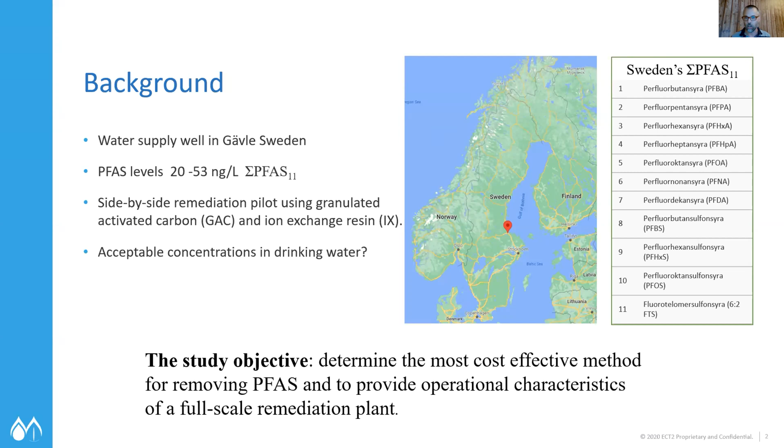So here's how it's, you know, none of this is particularly strange. We've been running these pilots around the world, we've done dozens of them. We've used exactly the same methodology here as we have in the States and in Australia and with our pilots in Germany. So both the IX and the GAC system is running in 2 columns in a lead-lag configuration.

So there's 4 columns total, 2 IX, 2 GAC. Identical, as I mentioned, to other pilots. This is an important point that we'll get back to later. And the GAC and the IX lines are also identical. So we sample weekly at 3 different points: the influent, after the first column, and then after the second column.

So a little bit of drilling deeper here on the technical level. Contact times for the GAC is 5 minutes per column, so 2 columns is a 10-minute contact time total. IX much lower, 2 minutes per column, so 2 and 4 minutes. Flow rate, therefore, is quite a bit different. So you've got 880 milliliters per minute on the IX side and less than half that on the GAC side.

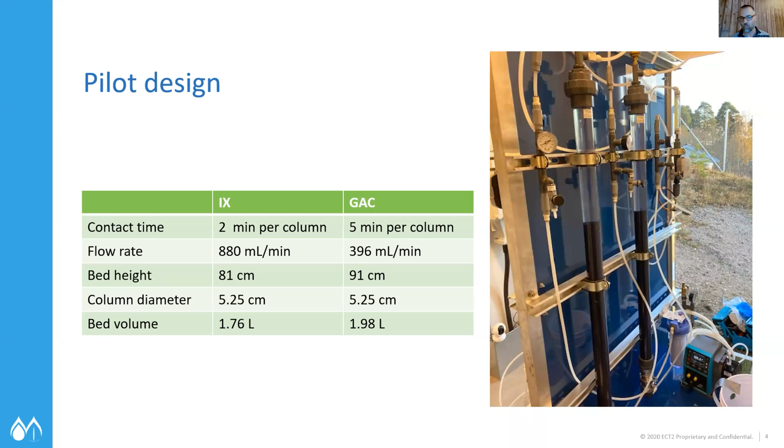The bed height here, we're looking at the GAC, so this bed volume right here, that's 91 centimeters. The IX is on the other side, so we can't see it, but that's okay - it looks exactly the same, except it has ion exchange material inside instead of the GAC. So total bed volume, it's just under 2 liters. All right, so all of that is good.

It's also important, and we'll get back to this again later, this is great water. Prior to the PFAS being detected, this was a really great source of raw water for the drinking water plant at Gävle. It's coming from an esker, so the quality of the water is great.

Since they've been running this well for years, they have 196 different parameters that they've been measuring over a period of multiple years. Here's just a few of them that are typically of interest for remediation - the chlorides, the TOCs - that this can have impacts when it comes to adsorptive media.

So just to give you an idea of what the water looks like, I just selected some of the average concentrations that we're seeing here.

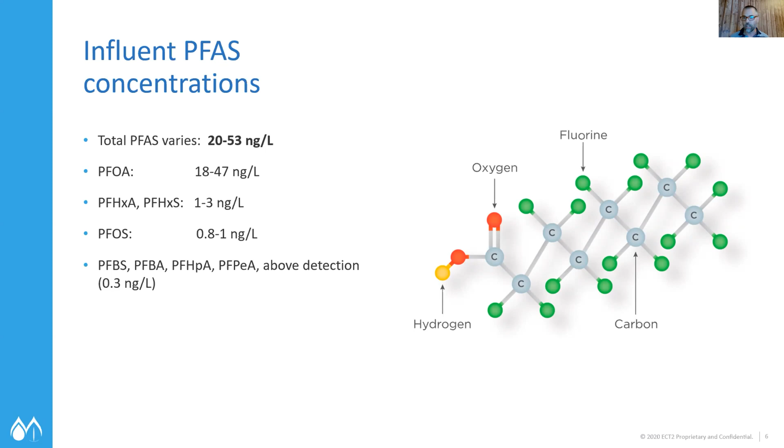Now the influent PFAS concentrations, as I mentioned earlier, they're quite low. What's interesting here is that it's almost all PFOA, 80 to 90%. Depends, again, a little bit on when we measure, but 80 to 90% of it is PFOA. There is some PFHxA, PFHxS, very little PFOS, and the shorter chains, the PFBS, PFBA, they're just above detection limit - single digits or lower nanograms per liter.

So what we ended up doing is 3 separate experiments, and they're all essentially run the same way. The first trial we ran between October and January of last year, and for the GAC, which we'll focus on, 5 and 10 minute empty bed contact time. The next one, trial 2, is an exact duplication of phase 1, except we took out the GAC and put in some new GAC - exactly the same GAC. We just did everything exactly the same, repeated, looking at repeatability, to see if we're going to get the same results.

And then on the third one, again, experimental conditions are identical with the exception that we used a different kind of GAC. I'm not going to get into the kinds of GAC that were being used here. The purpose of this is not to point out that these ones are not working - that's not what I'm getting at here. We have very confusing and strange results, and I want to focus on what is happening on more of a physical level rather than pointing out which GACs may be the cause of this.

So here's some results, okay? From the first trial, we saw these results and we assumed that something must be going wrong. So what we're seeing here is that the light blue, that's the lead GAC column - so the water that has already come through the lead GAC column - and we see breakthrough within 8 days.

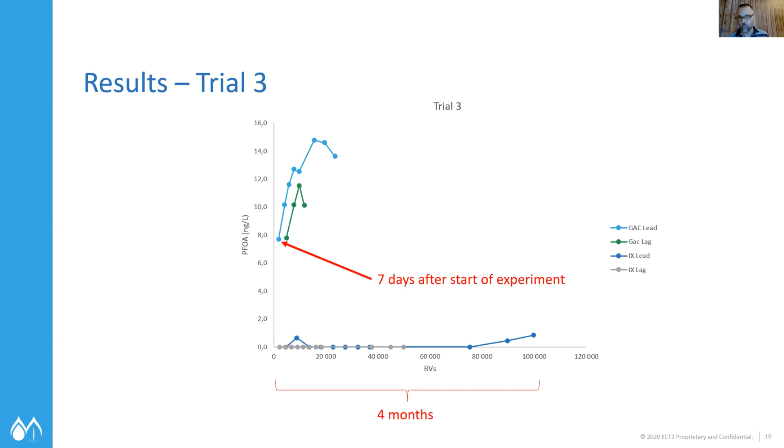Meanwhile, for the GAC, we start seeing breakthrough again within a week. All of this is really weird. We don't really understand it. We're trying to eliminate the potential sources of error here. What could be happening? So it comes down to this: why are we seeing this early PFOA breakthrough in the GAC?

And as I mentioned, we've talked to a lot of people. We've shared this data transparently with both GAC companies and asked for their feedback, some thoughts on what could be going wrong. And here's a somewhat short list of some ideas of what could be happening here.

Number one, naturally, you can go to the equipment and think about the apparatus. What could be going wrong? What could be failing with the apparatus? Lots of things can go wrong. There could have been contamination while loading the bed or doing the backwashing. Short circuiting of the flow. For example, if you have desaturation of your media, air gets entrained in the media itself, and when the flow continues, you can have short circuiting, so you don't get the full bed contact that you were expecting. It's possible, not likely, but you can't discount it entirely.

Incorrect bed volumes, feasible. I mean, all of these things are very unlikely. Incorrect flow rates, sidewall flow, it's all possible. It's impossible to completely remove the sources of error here.

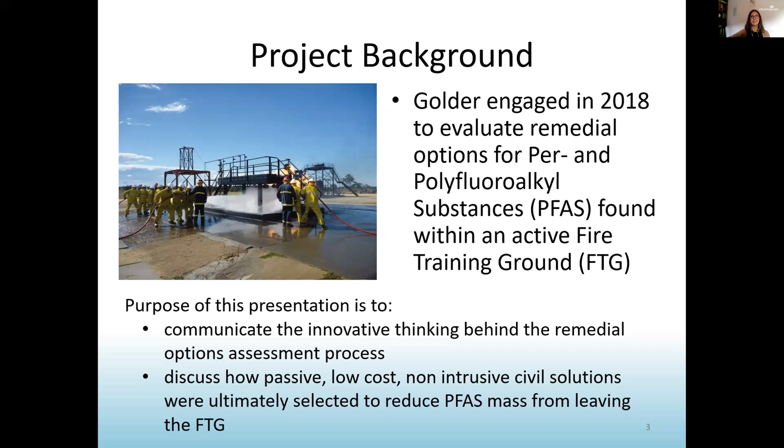Apart from the concrete pads, the site is unpaved and unbunded. This was an issue because some flooding events occurred and the water entering the site got enriched in PFAS contamination that flowed out from the site and could spread contamination in the surroundings, both in groundwater and in the surface water system. The area is a rural area with channels and fields for cattle.

Going to the environmental investigations, overall more than 400 samples were collected at the site. The greater effort was on the surface soil and cover, so concrete cores were collected - both surficial samples were analyzed, but also deep concrete cores in order to create a slab profile of contaminant concentration.

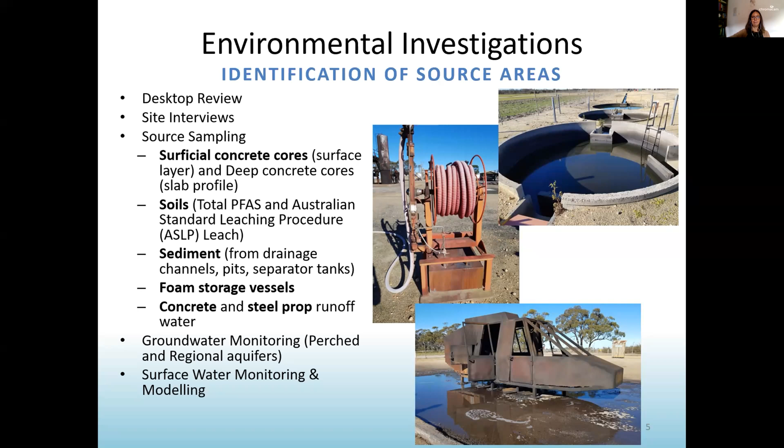Soil was collected and analyzed, both for total PFAS and for leachate concentration. Sediment from drainage channels, pits, and separator tanks were collected and analyzed, as well as foam storage vessels and the concrete and steel prop runoff water. In all these matrices, PFAS were found in high concentration. Groundwater and surface water were also monitored in samples, and some detections were also recorded in groundwater.

The goals of the remedial option were, of course, to provide no unacceptable risk to beneficial uses, to comply with Australian guidance documents, to minimize the potential for human exposure and thus the risk to human health, and to minimize the risk to the environment, reducing PFAS mass discharge to the environment via surface water or groundwater because of the runoff water coming from the site.

Another goal was that the remedial option needed to be practically implemented, because we all know many of the technologies to remediate PFAS are still in an experimental, emerging stage.

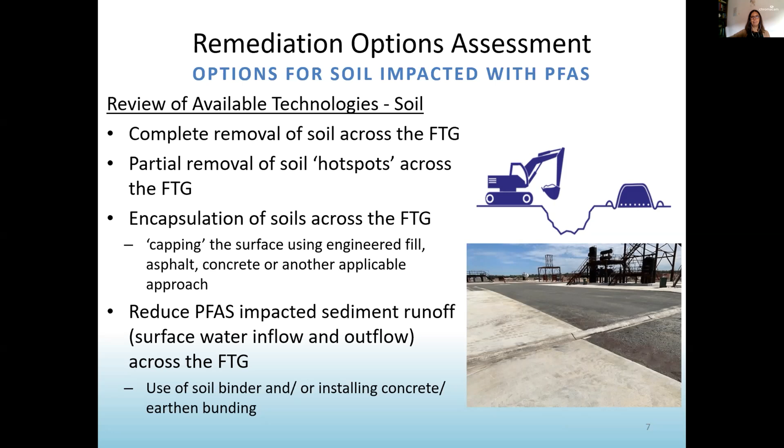We have a lot of impacting matrices. So for steel props, which were impacted by PFAS, it was assessed the complete removal of the steel props or the removal of only the outer layer using high pressure blasting or sandblasting.

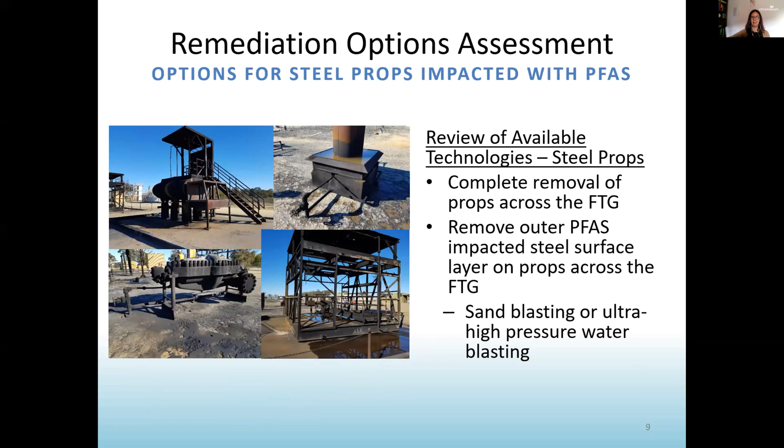Water - runoff water impacted by PFAS. The remedial options which were analyzed were the collection and treatment of PFAS water leaving the site, or the use of in-situ passive treatment within the drainage channel, like the use of RemBind or a similar aggregate. In the end, this option was discarded because water was not only impacted by PFAS but also by kerosene, and the fuel would absorb to the activated carbon of the RemBind, making it not effective on the PFAS.

A quick description of the trials. The trials were focused on the concrete because it was challenging to find a solution, and they were impacted.

Some treatability trials were conducted to assess if waterproof sealant could be effective. Cores were treated and then tested. Surface leachability testing was conducted. The results were quite interesting, but the high temperature can be an issue.

As you can see in the picture on top, during the fire training exercises, the temperature in the concrete can rise up to 670 Celsius. So at the end, this option was retained only for the concrete tanks and the concrete drainage channels.

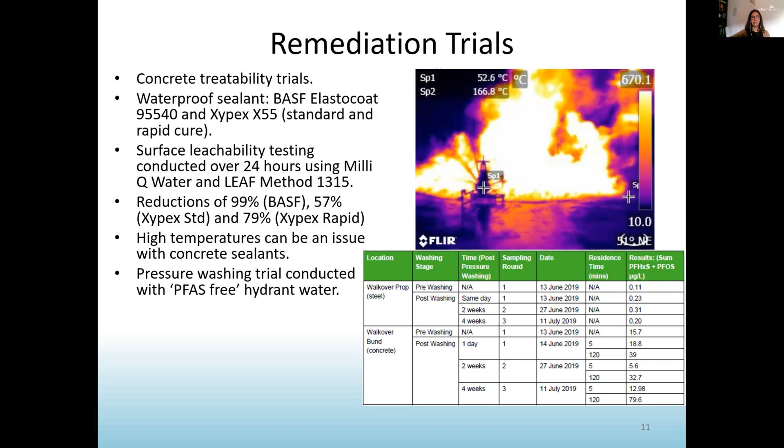For the impact due to the soil, it was decided to remove only the hotspots while capping all the unpaved site. So the goal was to mitigate both the leaching of contaminants to groundwater, but also the human health risk from direct contact of PFAS in topsoil.

Regarding the impact in concrete, it was decided to cap the concrete surface with a new concrete slab and to use the sealant only for the concrete tanks, thus reducing the overall PFAS concentration in the runoff water.

Another action undertaken was to remove the impacted sediments from the drainage system and to cap the open drainage channels with a new concrete precast channel, while no action was at the end undertaken on the steel props.

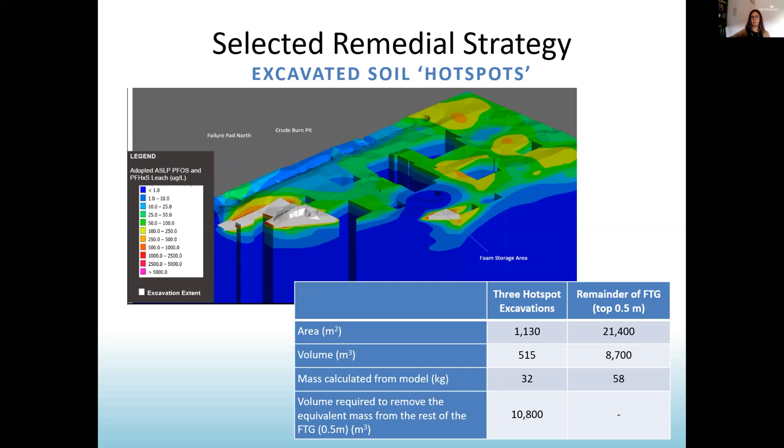Still remains 58 kilograms of PFAS at the site, but to achieve the complete removal, the overall volume of soil that needed to be excavated is more than 1 order of magnitude higher. Thus, the cost and the sustainability of the remedial action was not feasible.

Going to the conclusion and some sustainability considerations, through this project we were able to extend the life expectancy of the infrastructure without generating concrete waste nor removing steel props.

During the remedial activity and investigation, the operation of the facility was not interrupted, so good for the local employees. And also the materials were supplied from local suppliers in order to create a benefit to the community.

Overall, the cost for the remediation was $7.5 million, which is far lower than the estimation for the decommissioning and rebuilding of the facility, which was estimated at $37 million.

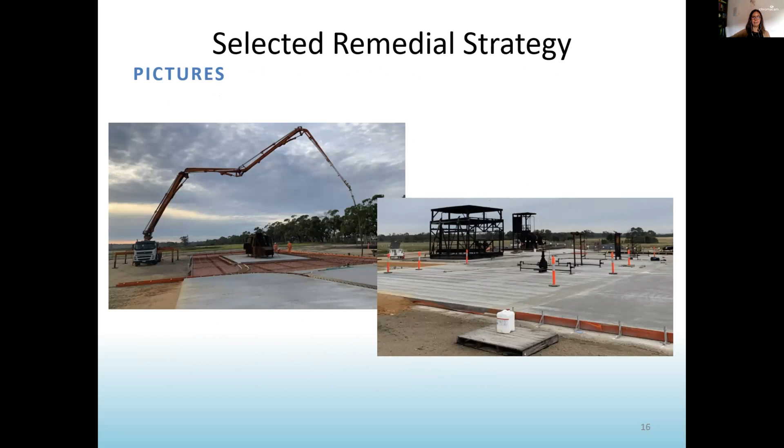And I conclude with some pictures of the actual remediation, the new capping of the concrete, the capping of the soil, and the sealing of the concrete tanks.

Recently, we got results of runoff water after the remedial activity was completed, and the concentration decreased by 3 orders of magnitude compared to the one before the remedial action. Thank you, everyone, for the attention.

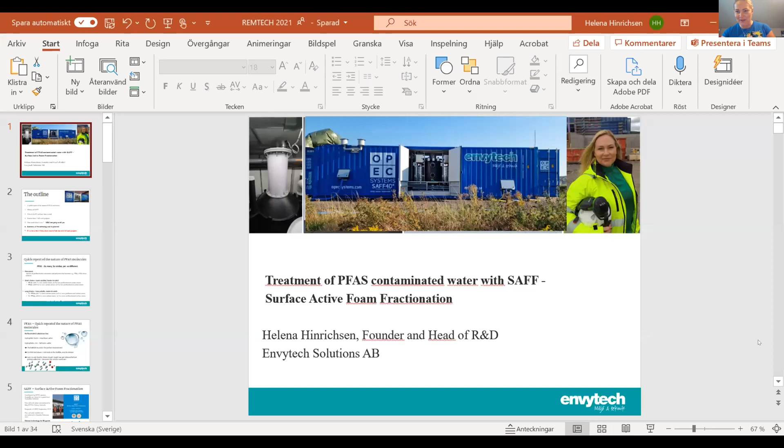So there we go. Good evening, Remtech. Love your show tonight. As a European, I always wanted to say that, so that felt good. My name is Helena, and I'm here to tell you about the SAFF method.

The outline of my talk will be a quick repeat of the nature of a PFAS molecule - won't bore you because I know you're all experts - a history of SAFF, what SAFF is and how it works. We have results from the first two full-scale projects with mobile plants. And yes, I will also tell you how much this treatment is costing you. At the end, for you to remember everything, I have brought you a summary. I said if we have time I'd show you more results, but I'm pretty sure we won't, so unfortunately.

PFAS, as you know, so many, so similar, but yet so different. We have the precursors, species of perfluorinated substances and polymers that become, for example, PFBA and PFOA when oxidized. We see this in our process, and that's why I highlight it. We usually talk about short chain - C6 chemistry and below - which are more soluble and hard to catch, and that is the same for every treatment method, not just for us. Long chain, C6 chemistry and above, is less soluble and easier to catch for everyone, also for us.

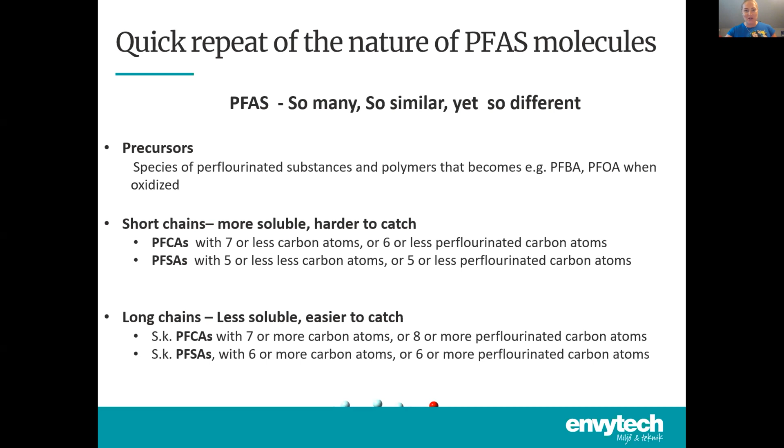The PFAS molecule, as you all know, has the red head - it's always shown as a red head, so I love that, since I am one - which loves to be in the water. It also has a hydrophobic tail, which hates to be in water. We use this in SAFF, as the bubble becomes the perfect holiday resort, the perfect environment for PFAS. So PFAS with a long sticky tail sort of adds on to the bubble, sticks its tail in there, and the head gets to stay in the water and get absolutely happy. By bubbling bubbles through water, we lift the PFAS up and recover it as a foam. That's the short explanation. Shorter chains have a shorter tail and don't stick as well to the bubble, but we still bring them up a fair bit - we call them top section swimmers. I'll be mentioning them too.

SAFF, surface active foam fractionation, was developed by OPEC Systems in Australia, as a result of a grant from the Australian Defence. They did research for 5 years, then first commissioned the full-scale plant in Oakey, Australia in May 2019. I managed to meet and fall in love with OPEC in September 2019. As I saw this technology and its potential, I was absolutely in love. It's been a few years since, but we now have the first two full-scale mobile units commissioned here in Sweden - the first in February 2021, and the latest just last week.

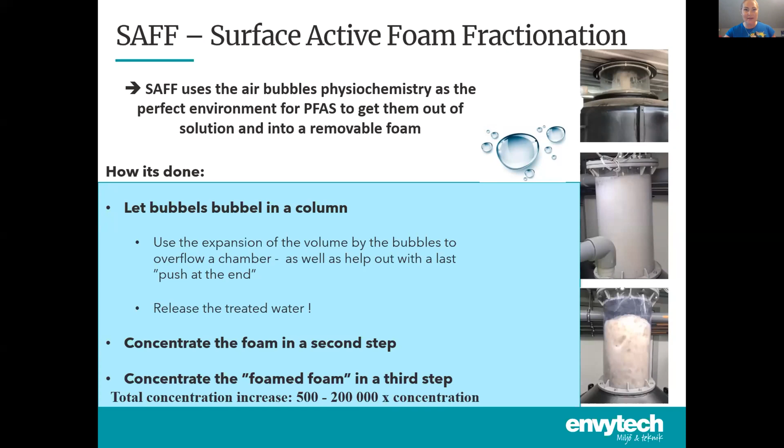So this is the inside of it. We have a feed water storage tank that starts and gets full with water. That kicks off 4 primary reactor vessels, as you can see here, the 4 big ones. They work like pistons in a car, so they're not in series, they're in parallel. As one fills, one empties, one runs. So it's a continuous inflow and continuous outflow, but we still do a bit of a batch principle.

After that first treatment is done, the water is treated from PFAS and released to recipients. Then we do it all again in these smaller vessels. The secondary fractionator is the second picture to the right, and the third time in these third vessels, which is the third picture. It's really hard to comprehend how this works, so I will actually show you because it's so much easier to see.

So what you see here is the magic foam that forms when you bubble air through water, and we bring up the PFAS to the top, letting it spill over and get removed. At the end of this, we do a push with treated water to get those top swimmers out of the water too. So we get a bit more PFOA, or the short chains, by doing that, so we get a lot better treatment.

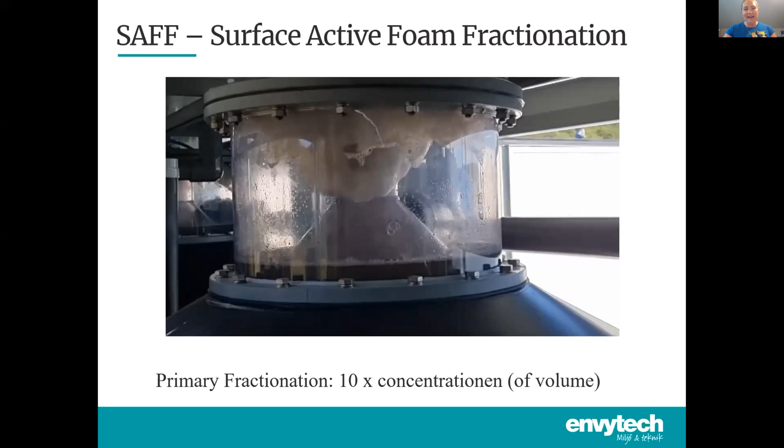The next step, the secondary, looks like this. Here we take the PFAS that we removed and concentrate it with a slightly different treatment method. So here we have about 1,500 times the concentration factor we had initially. You can see that's a totally different foam. The third one, well, you can just see that this is nasty, really high concentrations we're working with. You can just see that go up.

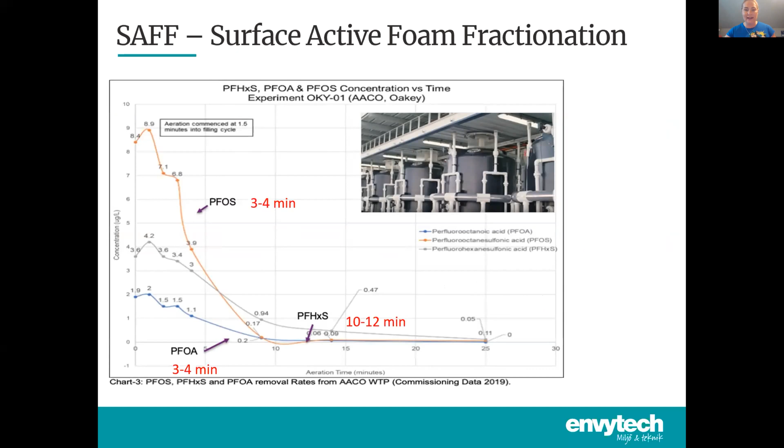When we do this, we have different treatment methods. PFOS and PFOA, we've seen come out in about 3 to 4 minutes. PFHxS has a bit of a longer time period, and we found a sweet spot at 19 minutes. That's when we get the most PFAS out for the least energy consumption, because that's the only thing we use besides air - electricity.

So this is what it looked like in the beginning, 2 years ago. This is the first full-scale plant in Oakey. It's been treating 50,000 cubic meters of groundwater. It has reached the target ever since, which is 70 nanograms for PFOS, PFOA, and PFHxS, the sum of them. It has not exceeded any guideline levels in 2 years. And from 50,000 cubic meters, we have produced 10 liters of PFAS concentrate.

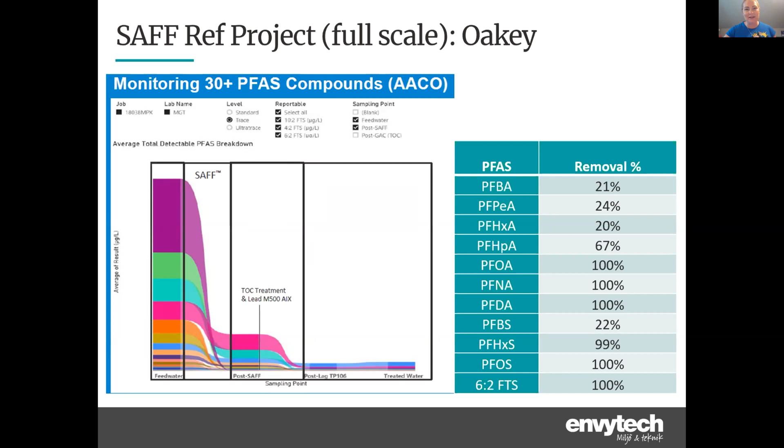So I came to Australia, fell in love with it, and I said, oh, I want to take this to Sweden - I needed it in my project. How can we do this? And they said, oh well, we can build you a bench scale model. And I said, yes please. And so they did, and so I left Australia and I got these little PES with me. It looks pretty simple, but it works really great.

And as I came home, I got offered the chance to be at the Environmental Research Institute of Sweden. They were doing research for good PFAS treatment methods for leachates, and asked me if we wanted to be part of it to show the SAFF model.

And I said, yes, of course. So we went there and we got to trial the little unit on 5 different leachates from all over Sweden. And these are the results that I got together with IVL.

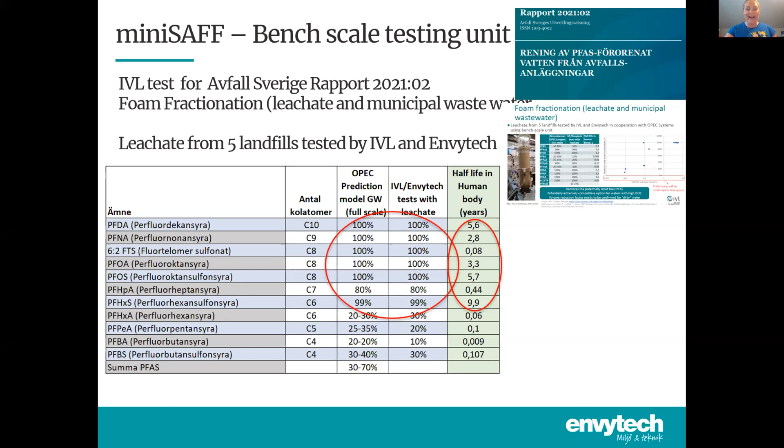At the time we got these results, I had entered a public procurement project for leachate in a landfill, and I actually managed to win it. So welcome to Telge Återvinning, where we have commissioned the first SAFF plant in the world.

Let me tell you, this water is absolutely hard to treat. Many different methods have been trialed but failed. It doesn't differ that much from normal leachate - it's got everything and anything: metals, oil, phosphor, anything.

So that was like an extra challenge added to that project. But we had won it, so there was nothing to do but just jump into it. I held my breath, I must say that.

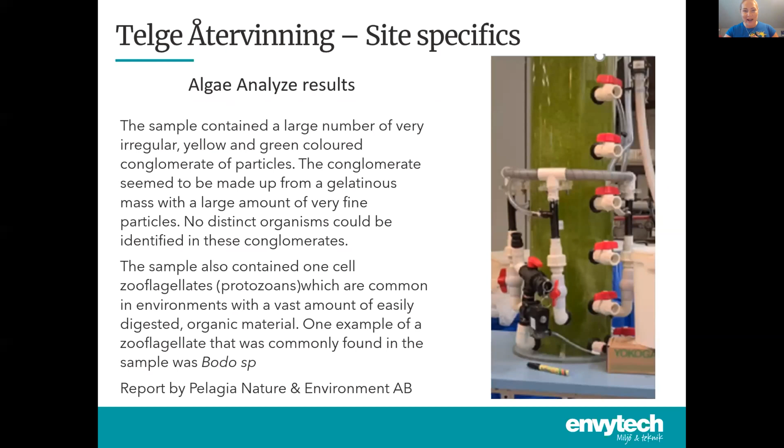But then COVID hit, and as you know it affected us all, and it affected the transport of the SAFFs to Sweden. But the project had to start, so the client asked how we were going to do that. And I said, well, let's have a good try with carbon and see what we get, and compare it to the SAFF later on.

And so we did. I put up a two-step mixer. We had a flocculant and precipitation tailored for this algae, a lamella clarifier, a 38 cubic meter sedimentation tank, and 1,500 kilos of carbon just to knock out the DOC and all the other stuff in there.

And then we thought we were going to use carbon for the PFAS as well. Well, that only took 4 days before everything was blocked, and the PFAS was just as high going out as coming in. So that didn't work really well.

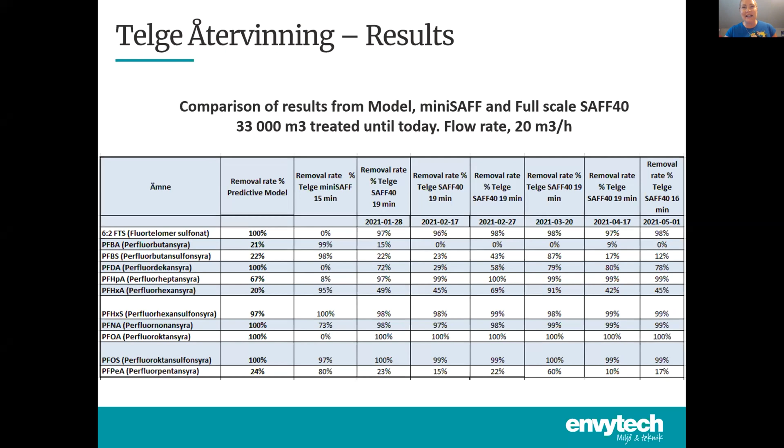Here now we have no pre-treatment method, nothing - we just take the leachate and it goes straight into the SAFF and then straight out. The target for this project was 50 nanograms per liter PFAS, and we achieved that really well. We have a flow rate of about 20 cubic meters an hour, to meet a yearly flow rate of 120,000 cubic meters a year.

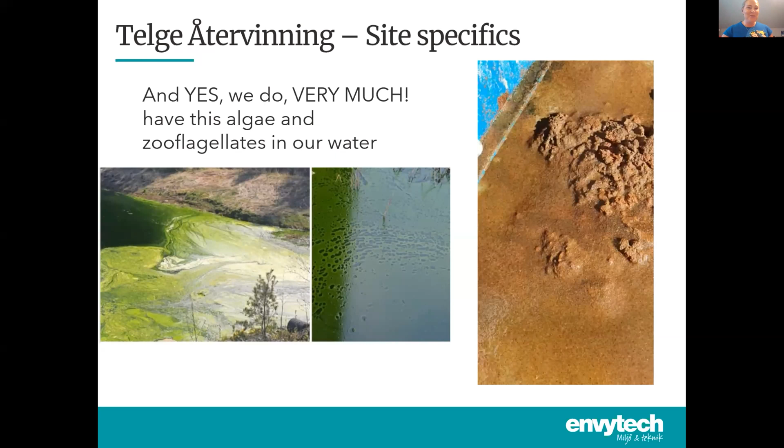I just want to show you that we have a lot of algae, and that's pretty much it. We have a second plant going, and that works really well. For costing, as I promised, it's about 0.1 euros per cubic meter treated for the leachate, which is fantastic, and about 8 hours of service technician time a month. So that's about it.

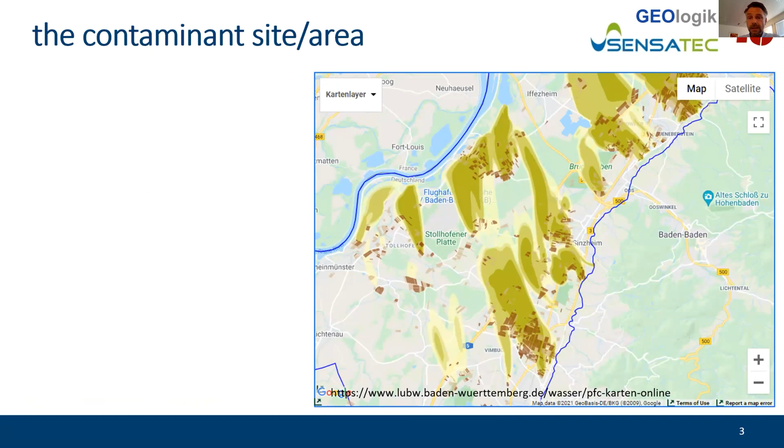The site is close to Baden-Baden and Rastatt in southern Germany. There's PFAS contamination of agricultural topsoils, which originate from compost produced by composting paper sludge that was heavily contaminated with PFAS. That had been offered to farmers for free as a so-called soil conditioner, and applied for some years.

Now we have, on average, PFAS values of about 270 micrograms per kilogram, and they have been persistent in this area for more than 10 years. They gradually elute into the Rhine River, which you see on the top left-hand side of this aerial map.

So our remediation concept was based on elution of PFAS from the topsoil, then collecting it in the rather shallow groundwater typically found at the site, and then eliminating the PFAS from the water. This would all happen under very carefully controlled hydraulic conditions.

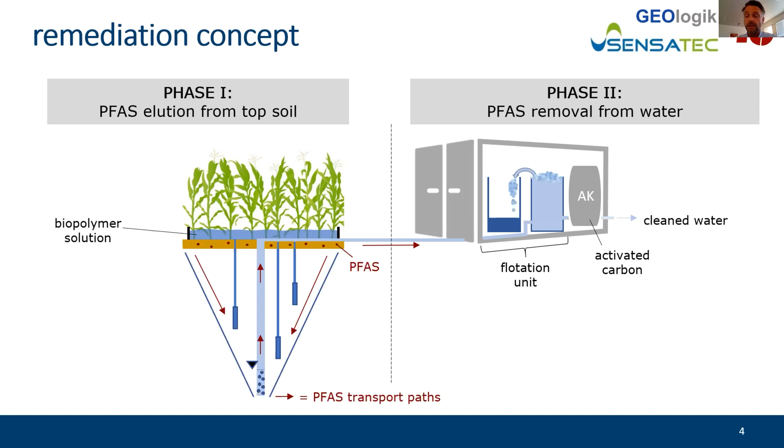The dig and dump technology in this case was no option, because you would definitely destroy the farmland. So the idea was to preserve the farmland and allow farmers to make use of their agricultural areas again, without destroying the soil composition, and especially not eliminating the topsoil where all the PFAS were accumulating.

So we did very extensive lab studies. The idea was to use a biopolymer that would effectively bind to PFAS and use this substance to help elute the PFAS. We did PFAS elution tests and flotation tests, and measured different types of soil physical parameters.

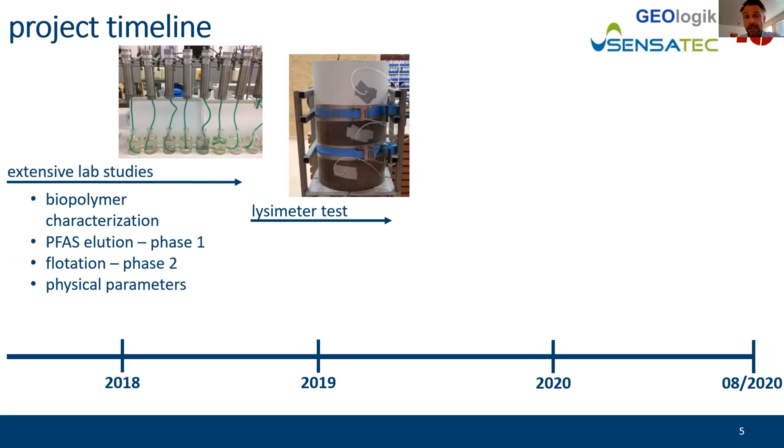Then we went to upscaling in the mesocosms. Basically, we made use of a lysimeter - I'll tell you more details about that later. Before we went into constructing a remediation unit and a water treatment unit, because we eventually intended to recycle the water used for the soil washing process. And then in 2020, we did a 3-week field test in the Rastatt area.

The first step, investigation of various polymers, was done with our partners at the Technical University of Berlin. We did structural analysis of different types of biopolymers - basically all these biopolymers had surfactant characteristics. So we identified, among others, the critical micelle concentration, density, viscosity, and also toxicity, because this was one very important aspect - not to destroy any central characteristics of the topsoil.

Here's some examples of the elution tests that we did. Just as a side information, in Rastatt they did a lot of analysis of agricultural products derived from these affected sites, and they found rather high values of PFAS in plants, especially in the fruits that contain a lot of proteins. So protein was one of the biopolymer parts that we made use of.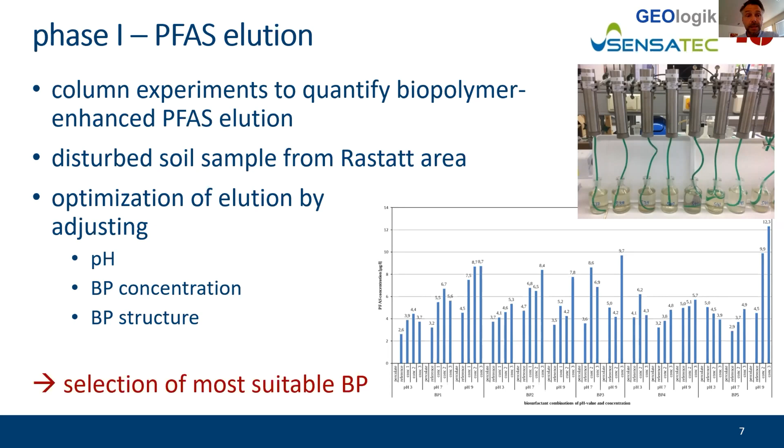We also investigated foam characteristics, because eventually when we extracted the groundwater, this would still contain the biopolymers, which we wanted to extract by foam fractionation, rather similar to what Helena was just showing us. We optimized the flotation parameters and did some upscaling in a small scale application. In very short application times, we reached 99% removal for the PFAS elution from the water phase.

Back to the soil treatment - the next step was after we had very positive results from the lab scale, we went into the technical scale for a proof of concept, now using undisturbed soil samples in an array of 3 stacked metal rings. We did PFAS analysis of the soil before and after the elution, and analyzed pore water by suction cups.

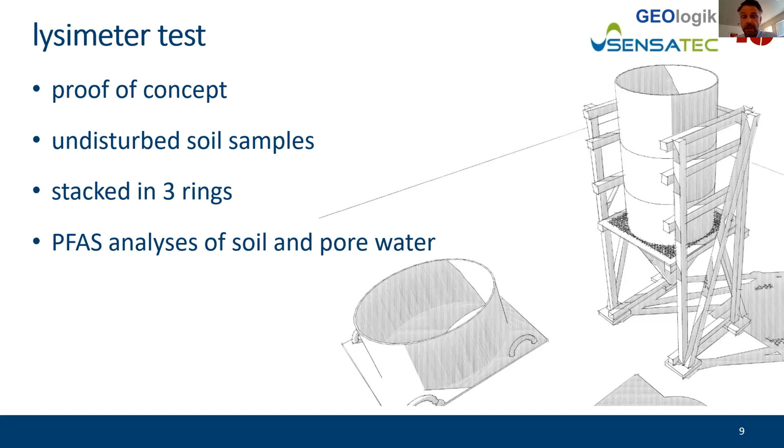Here are some pictures of it. On the left-hand side, this metal ring was extracted and lifted by a truck or excavator from the soil. In the central part of the pictures, you see how these rings were applied, and how water or surfactant-containing water was applied, letting it elute through these stacked rings, then using suction cups in each ring to gather pore water samples to analyze for PFAS and for biopolymers.

Now going to full scale. We designed and built a treatment unit for the water that was being collected on the site after the elution, directly below the area where the biopolymers were applied. You see on the left-hand side these 2 reactors, a sequential batch operation - one tank is filled while the other is being treated, so we can have a continuous operation here.

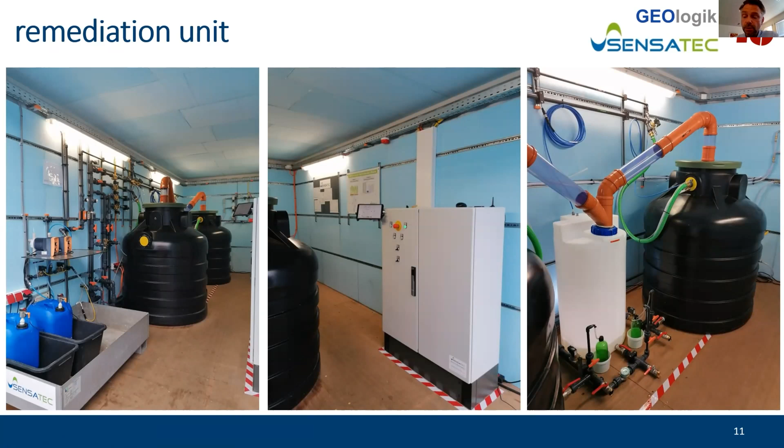Again, you see these transparent parts of the tube, so we could always check for the foam to develop and be transported through the system. There's the setup of the area. We had an active carbon filter just as a backup system - since this was still a research project, if any of these treatment parts would fail, we would still have the granular active carbon as backup. On the right-hand side, you see the foam running through the transparent tubes to this collection tube.

Here's some results. In the lysimeter, we managed to see 99% PFAS removal in the soil being treated. In the field test, after 3 weeks of application, we had 80% PFAS removal. We would have gone on with the treatment, but then winter came, and we didn't have a plant suitable to sustain winter - certainly not as bad as in Sweden, but even northern or central Germany can become pretty bad. So we shut it off for security reasons.

Eventually, we ended up with a successful development of an innovative new in-situ remediation strategy for the removal of PFAS from highly contaminated topsoils without completely destroying the soil structures. We are only using natural and biodegradable materials based on protein structures, and it was possible in this project to deliver very satisfactory results within a rather short time frame.

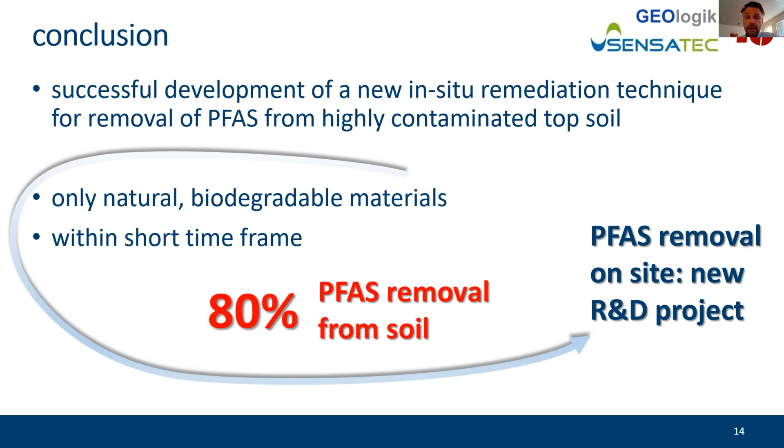Yes, I'm also going to talk about pricing. At least in Central Europe, it's extremely costly to remove and dump PFAS-containing soil, because all the waste disposal site owners know that the PFAS will never make it through the water leachate treatment system, so they simply refuse accepting these soils. The only option is disposal in hazardous waste dump sites, and if you add up all the costs, including transportation, you easily end up with costs, as indicated here, of 250 euros per cubic meter eliminated.

We can reduce that considerably, and further optimization tests are underway in the form of a new research project that I'll just show in the last slide.

We can perform feasibility tests in the lab within just a few weeks to identify PFAS mobilization site-specifically. We have a pilot test plant available for on-site tests, and we can easily do upscaling.

Using agriculturally based technologies, the outlook is now underway in the form of a newly established research project that will focus on on-site remediation, because we know there's lots of soil material still waiting for treatment since it is so hard to dispose of.

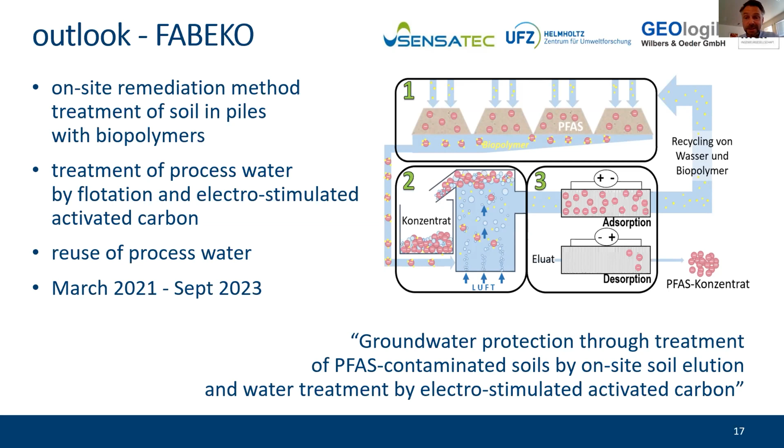That's underway — it started in March this year and will continue for another two years. I'll be happy to present it to you, maybe next year at Remtech Europe. So thanks for your attention. I'll be happy to answer other questions, and I hope I managed to stay in time. Thanks everyone.

You did, thank you. Q&As will be toward the end of all the presentations. I think now I'll pass it to Wouter. Good afternoon — no problem, and you did a great job. We are on time, so I hope I can do the same.

The floor is yours, and we see your screen. Can you see my screen? Yes indeed, great — well, a copy of it at least.

Thank you very much, and thank you to the organizing committee for accepting this talk. Today we're going to talk about the use of colloidal activated carbon that was injected into a multi-complex aquifer system, including a fractured bedrock aquifer itself. I'd like to thank my co-author, Ms. Benevenuto, and we'll get right into it.

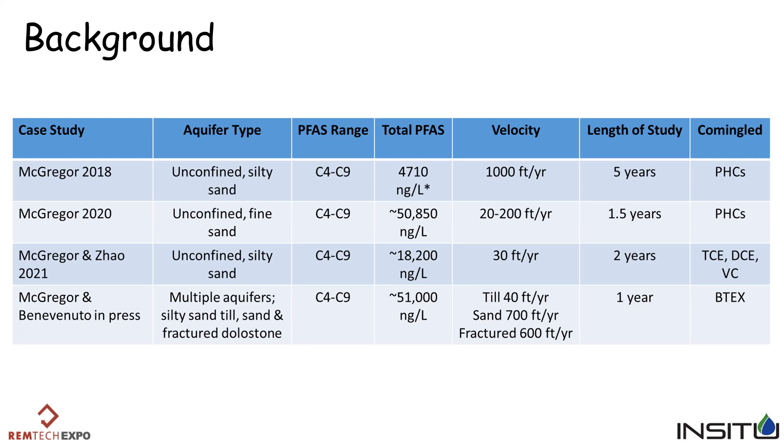The aquifer types have differed a bit, but the one I'm going to talk about today is the one at the bottom. Actually, it was just published last week, so you can change that to 2021. It was really a complicated aquifer system.

So, a very basic simplified diagram showing the aquifer system here. At the top, you have a silty sand glacial till. It overlies a sand unit, which overlies a fractured dolostone bedrock.

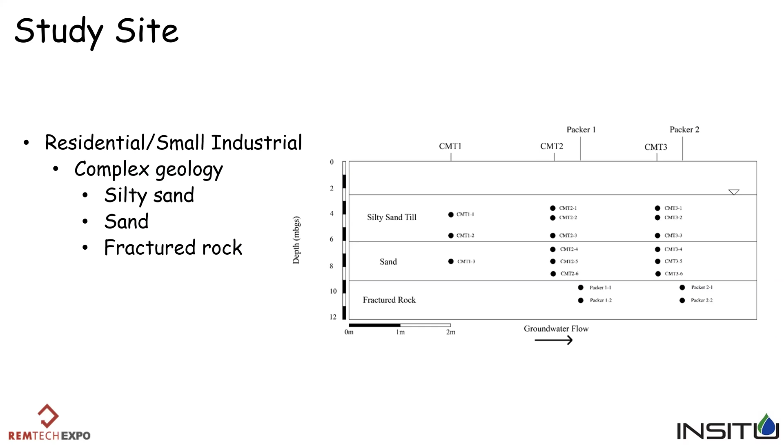The hydrogeology in simple terms is, we had a 3 aquifer system. The first one, the silty sand, had a hydraulic conductivity about 4 times 10⁻³ centimeters per second, which is typical for a silty sand till. This site was also in Canada, so we have a lot of glacial till like Northern Europe. The groundwater velocity, give or take, was about 10 meters per year in the silty sand.

Underneath that is a sand layer, more conductive, with a higher groundwater velocity that reflects that. Underlying that is the fractured bedrock. We did a lot of testing to look at the fracture zones within that bedrock using isolating packers, and we found 3 main zones with equivalent hydraulic conductivity shown there, 10⁻⁶, which is the bulk host rock, and right up to 10⁻³ equivalent transmissive hydraulic conductivity in the fractures.

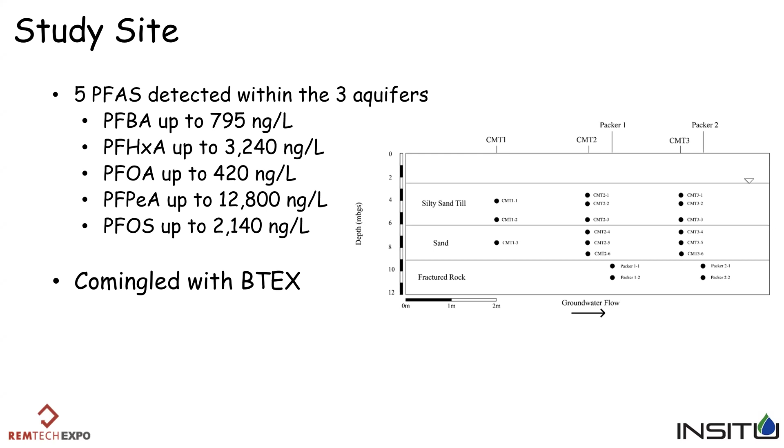So this slide just explains what we did here. The other thing is we took multiple cores of the aquifers themselves to look at before and after injection. We wanted to see where the activated carbon, or colloidal activated carbon, was being injected into. So we took lots of cores to look at that before and after. The material, well, we'll get into that.

We also sampled a lot for the general chemistry, as well as volatile organic carbon compounds and the PFAS. We did 4 sampling events over a 1-year period - basically a pre-injection, a 6-month, a 9-month, and a 1-year post-injection event.

So the injection program here, as I said, we used colloidal activated carbon, which is sold under a brand name called Plume Stop, manufactured by a company out of the US called Regenesis.

In the silty sand and sand units, we injected using direct push technology. We advanced down rods using a 2.5 meter grid, and over that grid, we injected within each aquifer about 15,000 liters of the Plume Stop solution at a 10 weight percent concentration. That's a pretty common concentration to use, and you'll see the volumes and masses we used.

Within the bedrock, obviously you can't advance direct push, so we used boreholes, and then combination packers to actually inject into the target fracture zones themselves.

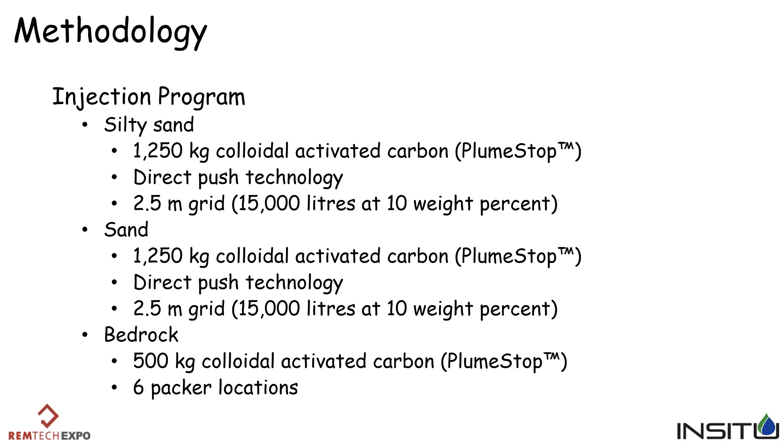So once we're into the results here, the first thing we want to look at is the distribution of the activated carbon itself. Obviously, in situ programs come down to contact between your reagent and the contaminant. If you don't have distribution of the reagent, you're not going to get any treatment.

Overall, we've seen about a 200 to 300% increase in the TOC concentrations post-injection.

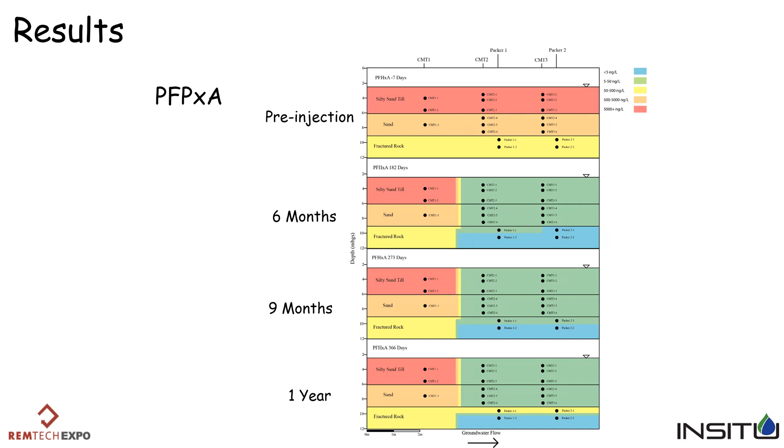Oh, okay, I can wrap up. We saw similar things with the BTEX - we had complete removal. So the findings are: we had great removal at six months, and BTEX was removed for greater than a year. The carbon was distributed well, but we did see breakthrough of the C4, C5 carboxylic acids in the fractured rock. We did not see breakthrough of the sulfonic acids.

So finally, I'd just like to thank the academic and our partners here. The academic partners are University of Waterloo, University of Toronto, and Carleton, and then our industrial partner, Polar Water Solutions. And I guess that's it.

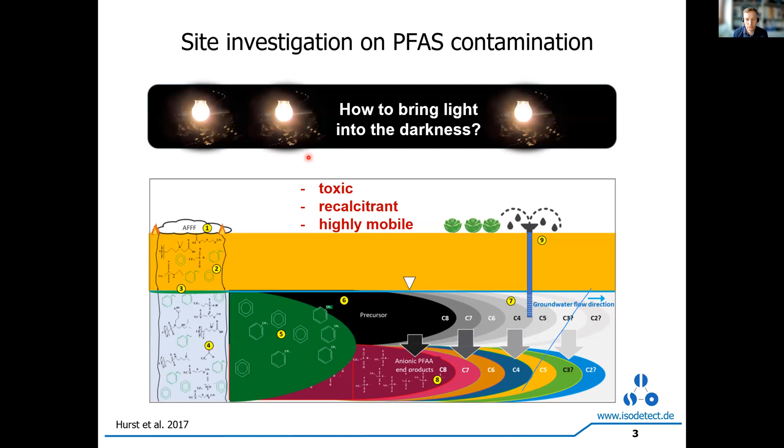So what monitoring tools do we have to bring light into this darkness? Yesterday we had a really interesting training session where we were introduced to TOF analysis, Q-TOF analysis, so target and non-target analysis by ultra high resolution mass spectrometry. There's really development going on to bring light into this PFAS contamination problem. Today I want to introduce you to a further possible tool to investigate sources and sinks of PFAS: compound-specific stable isotope analysis.

What are stable isotopes? Stable isotopes are atoms of the same element differing in the number of neutrons but with the same number of protons. For example, for carbon, we have light carbon, a stable isotope, and 13C carbon with one neutron more. So we have two stable isotopes present in nature with a distinct ratio, and for carbon this ratio is about 1% to 99%.

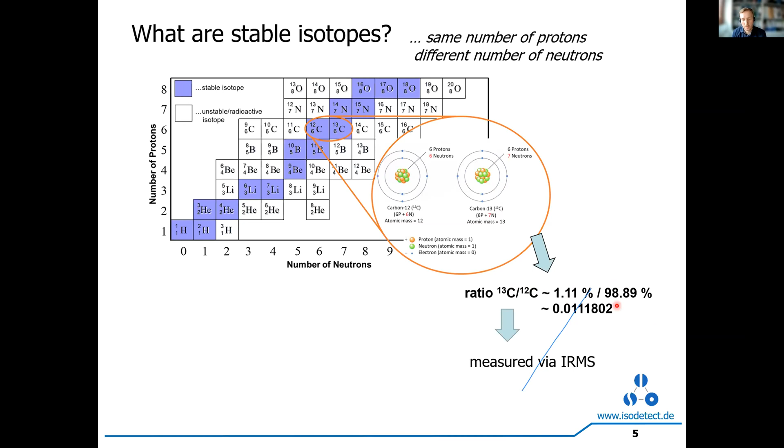This ratio can be measured for every carbon-bearing compound by high resolution isotope ratio mass spectrometry, and is set against an international standard. This international standard is VPDB, a carbonate where the actual ratio of 13C to 12C is measured and set as 0, because the difference between the ratios is really small. That's why it was introduced as an international standard, and all other compounds are measured against it.

The differences are presented in per mil. So when you have negative isotope values or isotope signatures, you have more light 12C and less heavy 13C in comparison to the international standard. And when you have positive isotope signatures, then you have more 13C.

This is just the background, but why do we analyze those stable isotopes? We analyze because every compound, for example honey, vegetable oil, whatever, and also of course pollutants, has a significant isotope fingerprint. They differ due to production lines, where they were produced, what were the precursors, and so on. Every single compound, depending on how many elements are in the molecule, has a distinctive isotope signature, and with this fingerprint we can do source identification.

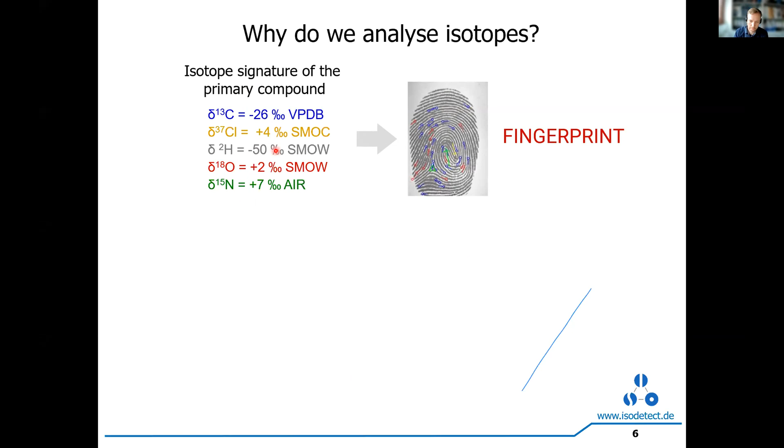A second big advantage of this monitoring tool is that it's a tool to investigate if active degradation is going on, a success control of degradation processes. The basic principle is that pollutant molecules with heavy isotopes are degraded more slowly and accumulate in the remaining pollutant pool. This is because the activation energy, or bond energy, between a heavy stable isotope and light isotope is higher than the bond energy between molecules that only have light isotopes inside.

That's why, due to degradation of those contaminants, the residual fraction enriches in heavy isotopes. Shown here by the example of benzene, all molecules with only light isotopes are degraded by microorganisms through biodegradation processes, while those with heavy isotopes accumulate in the remaining pool. With further degradation of the contaminant, the isotope ratio of 13C heavy to light increases, so you have a shift in the isotope value from, for example, -30 per mil up to -24 per mil or even higher.

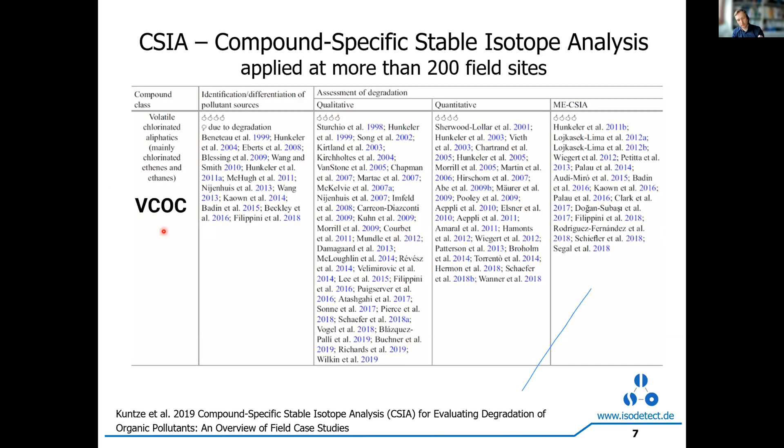This tool has already been applied since the early 2000s at more than 200 field sites, as you can see in this review. It's been successfully applied in source identification, both qualitatively and quantitatively, for example for vinyl chloride, volatile chlorinated organic compounds, BTEX, MTBE, ETBE, PAHs, heterocyclics, explosives and pesticides. So many different compounds, many field sites.

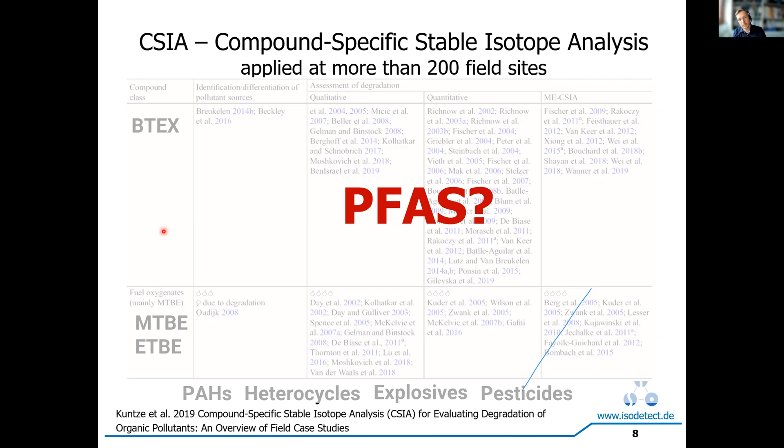But the question is, what about PFAS? So far, there is no compound-specific stable isotope method available in the literature describing a stable isotope analysis on PFAS compounds. That's why we focused in the last year on developing such a method.

Why was there no method available so far? It's because of the methodology of compound-specific stable isotope analysis, how it's measured. Most importantly, traditional compound-specific stable isotopes are measured via gas chromatography isotope ratio mass spectrometry. That's why the first step, shown here for PFOA, is that you need a GC-suitable compound for separation of the compounds. This is the first critical step - you have to convert, for example, PFOA to a GC-suitable compound to be measured on the GC.

After injection, the different compounds are separated by gas chromatography, and in the second step they are converted to a measuring gas - in the case of carbon, CO2. This is a critical step for isotope fractionation. Additionally, there can be side products because of the fluorine, for example hydrofluoric acid, which can damage your isotope ratio mass spectrometry.

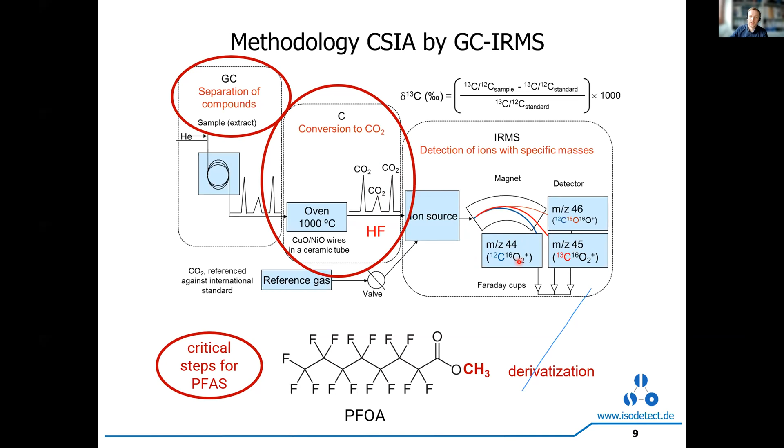At the end, your CO2 molecules from each separated compound are converted and then measured in the isotope ratio mass spectrometer by their mass. For CO2, the most important masses are 44 and 45, and the ratio between these two masses represents the isotope ratio of your sample compound.

So we recently developed the first pioneering compound-specific stable isotope method on PFOA. We ordered a PFOA compound from a supplier and successfully measured isotope values in several injections with high precision and good accuracy, with an analytical error of plus minus 0.5 per mil.

Not only this, we also measured PFOA from a second supplier, and as you can see, we were already able to measure distinctive differences between those two PFOA compounds - the second one showing minus 30.6 per mil. That's why there will be some options for forensic investigations using compound-specific stable isotope analysis.

Additionally, we were also able to measure shorter chain perfluorinated carboxylic acids. So we have first results showing that these shorter chain carboxylic acids can be separated on the GC, and then also have their isotope values measured.

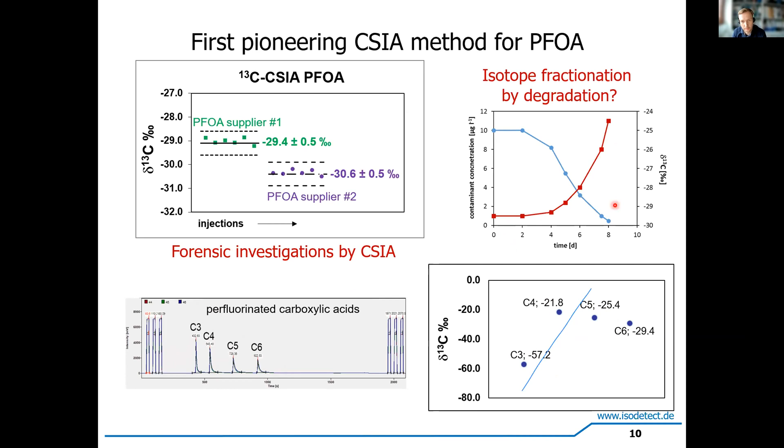But the question was whether isotope fractionation - a shift in the isotope ratio due to degradation - is also taking place. That's why we applied two different chemical transformation reactions to test our compound-specific stable isotope method. The first reaction was set up by my colleagues from the Helmholtz Center for Environmental Research, and it was reductive defluorination, driven by hydrated electrons produced by UV irradiation of sulfite, as shown here.

In addition to this, we also investigated a second example of chemical transformation.

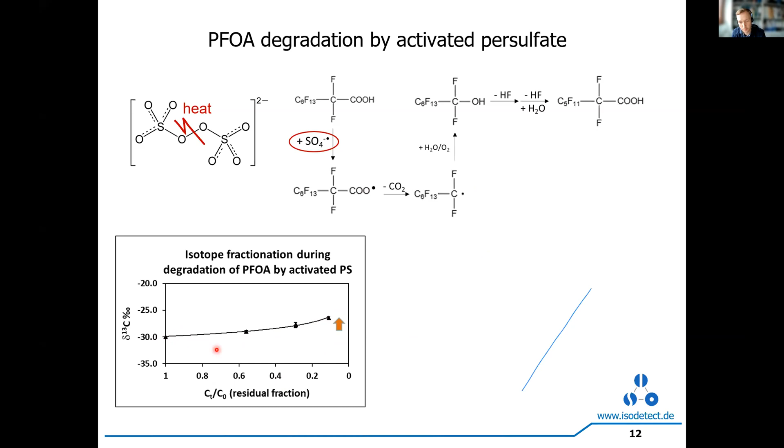It was catalyzed by activated persulfate, heat activated, with a sulfate radical. With further reaction with the sulfate radical, the PFOA is further degraded and decarboxylated, as shown in this chemical transformation. We took samples after certain times, and with further degradation of PFOA, we only see a minor shift, but still significant, in the isotope values from minus 30 to about minus 27 per mil. We were also able to calculate the respective enrichment factor.

Comparing these two different chemical reactions, we see two distinctive slopes, and we are already able to distinguish between those chemical reactions. So there are options to calculate, for example, a success control, the percentage of degradation, using this distinctive enrichment factor, independent from the concentrations.

In summary, we were able to show that with compound-specific stable isotope analysis on PFAS, there is potential for differentiation of degradation pathways, as shown by these two examples. Quantification of degradation is possible afterwards, and due to measurements of two distinctive PFAS suppliers, we were able to do forensic investigations.

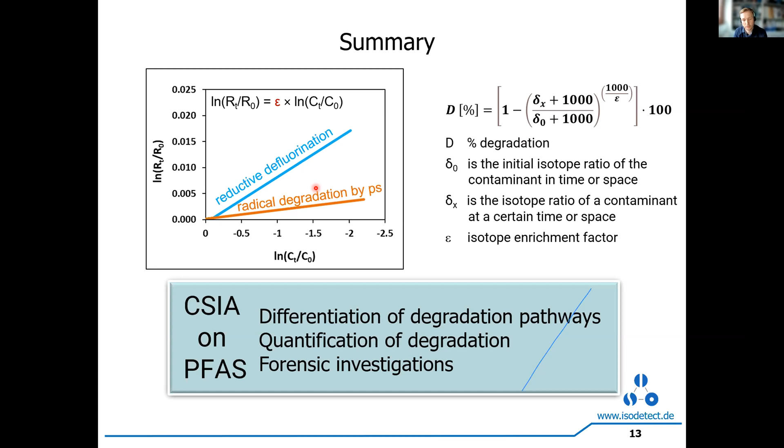So what is the outlook for this interesting, promising topic? Of course, the first challenging step will be to go to the field site, where we have really low concentrations of PFAS, as already seen in previous talks. So we have to enrich the PFAS out of groundwater or soil, for example by solid phase extraction methods, and there we can also have some matrix effects.

So we did some first experiments in the lab with water before it was diluted, and then afterwards extracted by SPE. We had really good recovery, and we didn't see any isotope effects between the sample measured directly and the one extracted after solid phase extraction. So there are options to enrich the specific PFAS compounds from groundwater.

Secondly, and most importantly, we don't want to stay only on PFOA, so we have to broaden this method also to PFOS. We are currently developing a method not only for carbon, but also trying to establish compound-specific stable isotope analysis on the sulfur from PFAS compounds. And of course all the shorter chain ones, the precursors, are really challenging to develop the respective CSIA method for.

At the end, our goal is to establish a database on isotope fractionation factors for remediation measures that will be available to everybody, to support degradation or remediation measures at field sites as a success control, or to evaluate sources and sinks of PFAS contamination.

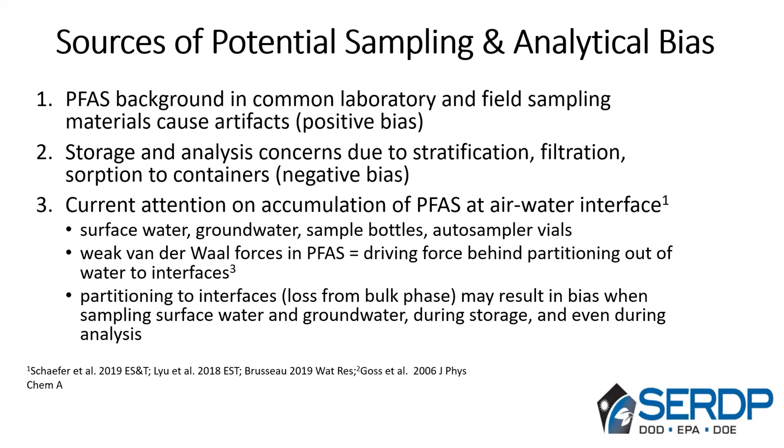The question is the degree to which it happens, and does it have an implication for sampling? We know there's this potential for partitioning to interfaces. The question is whether it actually results in measurable bias.

So the objectives of this particular project were to take a look at very real scenarios in terms of sampling, and to determine if there are factors occurring in the field in water columns, both surface water and groundwater, that might cause bias. And if this is the case, how to get around that, how to identify sampling approaches that might minimize bias.

The second objective was to take a look at the field materials that we actually use when we go out and sample for PFAS in the field. This is actually published, and I'll show you a link to that in just a moment. The third objective was to quantify the impact of sample hold times. Some great work has been done, and I'll point out literature for those of you interested. We didn't conduct original research on objective number 3.

The last one was to really take this information that we get from this project and from the literature to stakeholders, both federal, state, international, and contract labs where appropriate. That's really to help inform the sampling guidance.

So what we have is a combination of field and laboratory approaches. Stratification in surface water and groundwater has a field and lab component. The field sampling materials, that's clearly a lab study — we brought materials in. Sample storage, again, we deferred to that published piece. And then it culminates in outreach and technology transfer.

I'll point you to a document on the SERDP website if you're interested in the culmination of this information. So just a few pieces out of this project.

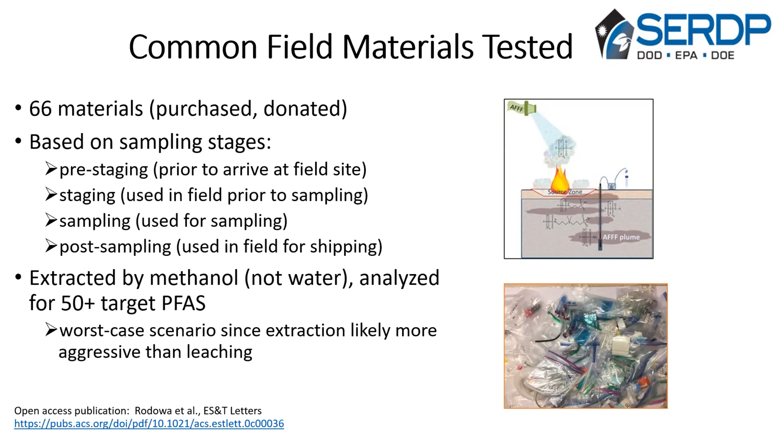We analyzed for 50 target PFAS. This was done by liquid chromatography, tandem mass spectrometry. Because it's a methanol extraction, it's kind of a worst case scenario - more aggressive than just leaching, though we didn't use a reaction. So think about these values as worst case scenarios.

These are actually discouraged at the moment in several guidance documents, both state and federal. There's been a lot of concern that ice packs, both their exterior and interior contents, could be sources of PFAS. We found no positive detections, but there's really no plausible path for the ice packs - no detect, and that includes opening them up and analyzing the interior contents. So no detection. Now why would this be important?

Ice packs are recyclable, they're green, you're not using ice, you don't have the mess. So we've been avoiding something that really, at least to date, in these 6 brands, doesn't pose a risk to your analytical data.

In the case of aluminum foil, every now and then you use that in the field. We found one positive detection - it was actually on the box, stick resistant, which would suggest it was potentially treated. You get a positive detection, but what does this mean?

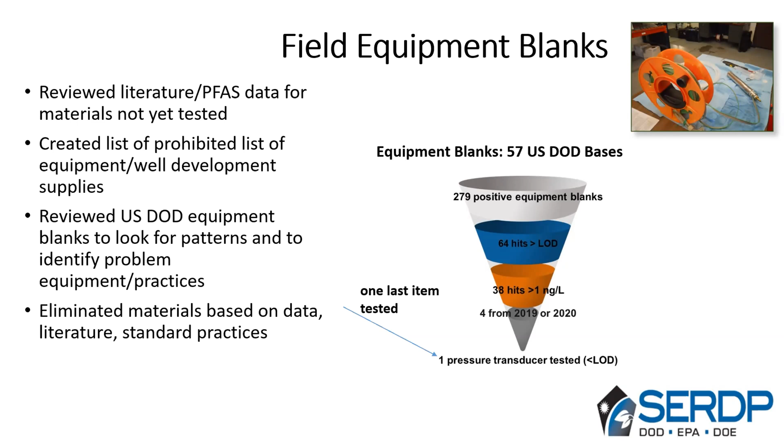So the key points are: please think about whether or not a field material or any material had direct contact with your sample. Most of the materials we use in field sampling do not. We still think it makes sense to avoid PTFE, and it's fairly easy to do and somewhat easy to recognize, like in the case of tape. But the risk is low, especially if the material doesn't come in direct contact, though we think it's generally a wise idea to avoid it. Lastly, those sampling practices in terms of field sampling seem to be well established and developed for other contaminants, and seem to be working well, as evidenced by what's in the DoD field equipment blank database. If you're interested in this information, there's an open access article listed below in ES&T Letters, where we detail the equipment and materials sampled and what we obtained.

In terms of storage stability, I really encourage you to take a look at a fantastic study coming out of the AXYS Lab in Canada. Woudneh et al. did a great job, and they performed a comprehensive storage stability study. They basically found no systematic bias statistically, and they did enough replications, which makes it a great study, to conclude that they did not see bias in storage over glass, HDPE, or polypropylene over time. They looked at storage conditions at 20 degrees C, 4 degrees C, -20, up to 180 days, which is longer than what's currently in, say, EPA protocol. And they found it did not impact PFAS concentrations in a statistically significant way, except for the sulfonamidoacetic acids.

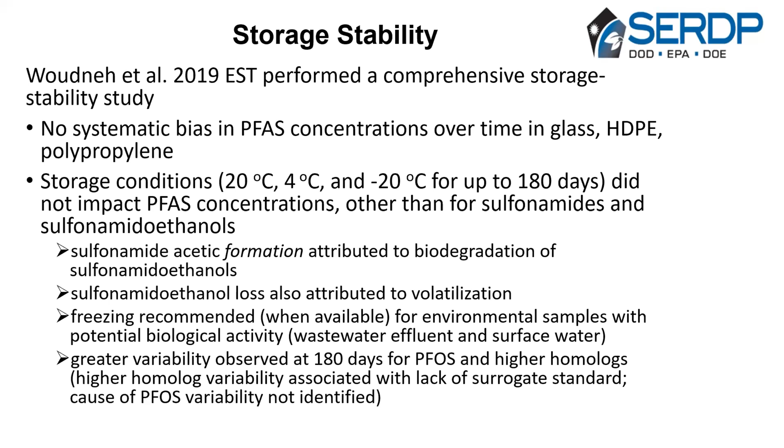The sulfonamidoacetic acids are intermediates in the degradation of polyfluorinated sulfonamido-based compounds. And those, in biologically active materials like wastewater and surface water, did biotransform under refrigerated conditions. So if you're interested in sulfonamidoethanols, those are the ones to watch, the ones to keep in mind when it comes to storage stability. Otherwise, these compounds, especially the legacy PFAS, the acids, carboxylates and sulfonates, are very stable under the conditions they examined. So please take a look at that.

We moved on to looking at whether bias or stratification could possibly impact groundwater in standing wells. In a quarterly monitoring situation, wells stand quiet for about a quarter, meaning nobody's in there sampling, though groundwater tables are still moving, so it's not a totally static system, but it's left undisturbed for a quarter. We were interested to know, in low salinity and high salinity conditions, if we sampled at low, medium, high in these model groundwater wells, which aren't terribly large, maybe a couple meters high, can we see any evidence of measurable differences in PFAS concentrations as a function of position in this water column? The punchline is, the answer is no.

Within low salinity and high salinity wells, we had triplicate freshwater on the left, one DI control in the middle, and there was no background. We had one high salinity well, same groundwater, just taken to higher salinity. When you measure those top, middle, and low ports, you see no statistical difference between those measured concentrations. We concluded that this doesn't mean stratification is not occurring, just that interfacial area is likely very small, and the impact of that area for that water column is very small.

So we conclude there's really no need to modify current groundwater monitoring programs. For example, if you drop your pump through this water column, you're going to have further mixing. If you do low flow sampling, it's designed not to capture the upper portions of the well water anyway.

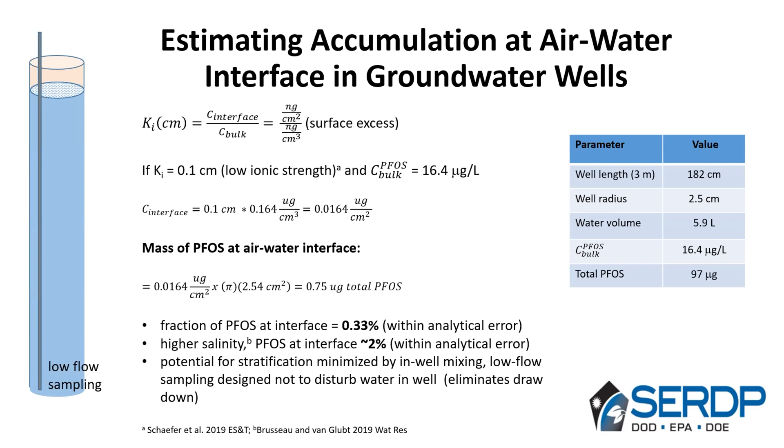If we took this measured data and compared it to theoretical predictions, that's where this great literature comes from on KI, the air-water interface, with values available in the literature. You can take the interfacial area of the monitoring well and calculate the mass you'd expect at that interface. Looking at the bottom here, the fraction of PFOS expected at the interface is only 0.33%, which is within our analytical error. In higher salinity you might expect more PFOS at the interface due to the salting out effect, up to 2%, still within our analytical uncertainty. So the punchline is we don't think that's much of an issue.

Moving on to the surface microlayer, there's been some attention focused on it. Jennifer, sorry to interrupt, but could you come to a conclusion?

You bet. So the punchline is that if you have foam, and you're in an area where it's naturally foaming, as we've seen in our upper states, you need to avoid foam when sampling surface water because elevated levels of PFAS do exist with foam. That's why you saw the talk earlier on foam remediation, because foam is a very effective means by which to collect PFAS out of water columns. But when it comes to the surface microlayer in the absence of foam, the concentrations there are 4 to 10 times higher, not 4,000 times higher as we've seen in the case of foam.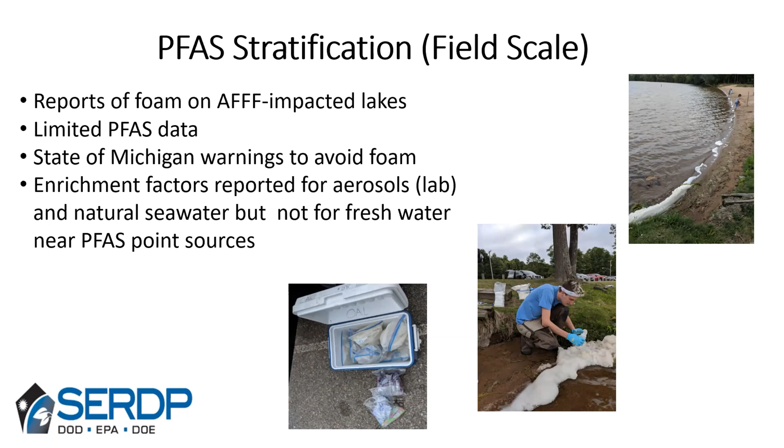So we're currently in the process of determining if the technique by which you sample surface water can actually impact measured values when in the absence of foam. The last thing I want to bring your attention to is we have a report on the SERDP website that puts all of our current knowledge of sampling guidance together in one location. We'd be pleased if you visited that site and took a look at the report. Thank you very much.

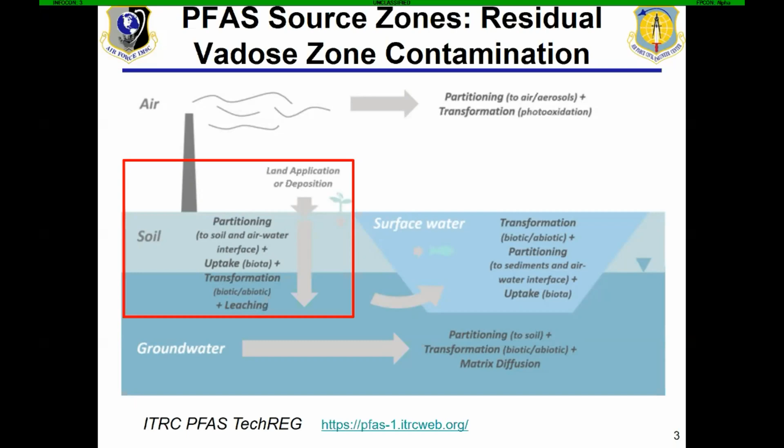And so I'm glad to see some interest here and evolving effort related to the treatment of unsaturated soils. But before one decides to do that, we've got to understand if and when the decision to remediate those soils is actually going to make a difference.

Another way of looking at all that is to compare boreholes where we collect soil samples and the co-located groundwater samples across the entire portfolio—again, thousands and thousands of samples. We clearly see greater concentrations in soil relative to groundwater, all else equal, and that divergence increases as the chain length of the compounds increases. But it's not linear; it tends to be this bimodal effect where the short chain compounds exhibit one behavior and the longer chain compounds exhibit another.

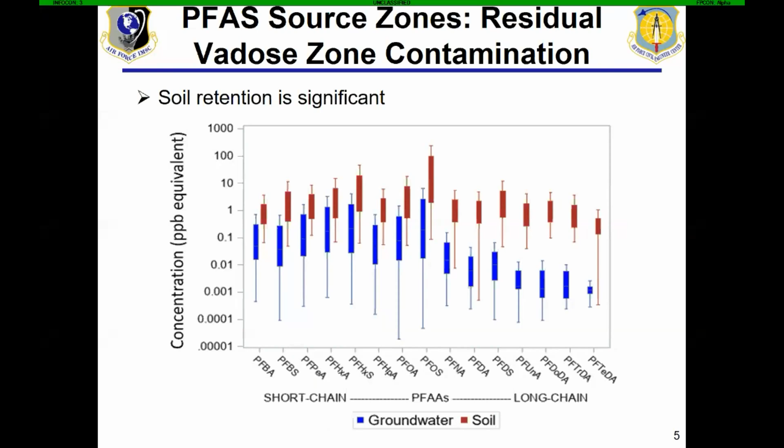And so the transport is rather complicated, as I'll get into, but this is all published, you don't have to take my word for it. These documents include all the data just presented along with a thorough description of how they were generated and analyzed.

So given that these vadose zones represent the preponderance of mass at these sites, it stands to reason that how we think about their source strength, as we call it, is in terms of flux—the spatially integrated mass within the footprint of these impacted soils as they traverse a cross-sectional plane parallel to groundwater above the water table. That cumulative amount of mass per unit time is defined as the mass discharge, and that's our metric of source strength. That cross-sectional plane at depth shouldn't deviate significantly from the footprint at the surface, largely because the vast majority of these compounds are non-volatile, so there's not significant dispersion through the soil gas matrix that manipulates the footprint at depth relative to the surface.

And so we can delineate these surface soils, to the extent these sites aren't disturbed, and get a sense for what the footprint looks like with depth, characterize the vertical profile, and then collect data necessary to generate these mass discharge estimates. That's what I'll get into.

But conceptually, it's really simple: what is the mass discharge from soil to groundwater compared to the mass discharge from groundwater plane A to groundwater plane B? That defines whether or not the surface soil contamination is or is not problematic in terms of sustaining a groundwater plume above criteria.

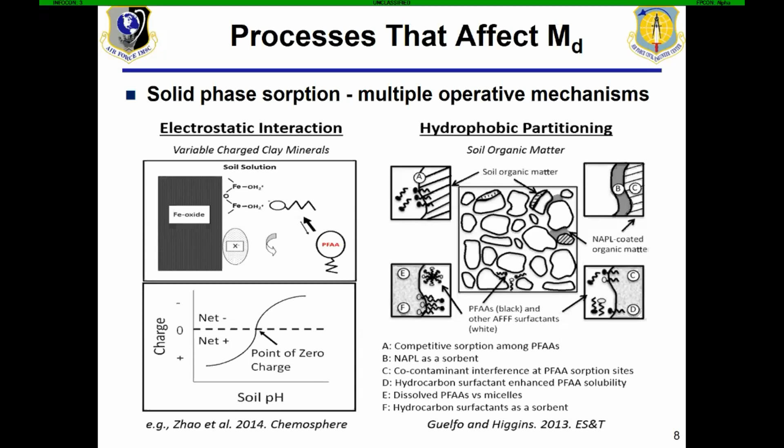I think there's a growing body of evidence in the literature that suggests some of these electrostatic interactions with PFAS in particular are in fact potentially covalent, but at a minimum operationally defined as irreversible. So what goes onto the soil isn't necessarily what comes off. You heard Jennifer describe how exhaustive it is to get some PFAS off of some soils with methanol, but regardless, if you can do that, that's not necessarily representative of what would come off under ambient in situ conditions with soil solution. So the point is, solid phase sorption of PFAS matters. It's more complicated than KOC, FOC, and the electrostatic interactions are highly relevant, but often discarded or ignored.

As you've heard extensively at this point, this air-water interfacial behavior is highly relevant for PFAS. These are surface active compounds. They partition across these air-water interfaces. Unlike bubbles in the case of AFFF in a downhole monitoring well, soil solution occurs in an unsaturated soil as a film across the solid phase, and that creates an air-water interfacial area. And it's that air-water interfacial area where these PFAS ultimately partition.

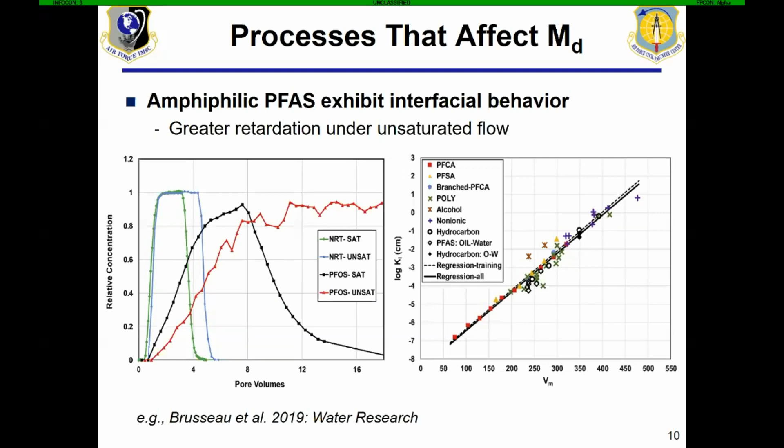People have done these really elegant experiments with unsaturated soils where they've incontrovertibly demonstrated greater retardation under unsaturated flow, and that has to do with this accumulation at air-water interfaces. So at any time in a porous medium, when there's air exposed to these molecules, that results in what's referred to in the literature as a surface excess, and that surface excess retards transport. So in addition to the retardation that occurs due to solid phase sorption, there is this retardation that occurs due to air-water interfacial accumulation.

I'll make a point for the record that, as a card-carrying soil scientist, I'm obligated to tell you that the amount of air-water interfacial area in an undisturbed in situ soil profile, all else equal, is much, much different than what occurs in, say, a packed column or a packed bed. So when you do these experiments, or take soil samples and manipulate that material and process them in a way that destroys the structure inherent in an undisturbed in situ soil sample, you greatly manipulate that air-water interfacial area such that the transport observed isn't necessarily representative of in situ conditions, and I would argue represents a worst case scenario.

So this is why it's important to do things either in situ or with undisturbed soil samples, as was the case with what Stephen presented earlier this morning. And I was glad to see he did that.

Another example for why retention in soils is relevant is the fact that there's this salinity effect. In general, as salinity increases, you increase the fraction that sorbs to both the solid phase and the air-water interface, at least within the environmentally relevant range. It's referred to as the salting out effect, and it has to do with the double layer thickness for these electrostatic interactions. As things get saltier, they sorb more. That's relevant to soils because soil solution tends to be quite a bit saltier than the corresponding groundwater at a given site, and that just has to do with all the biological processes within the rhizosphere.

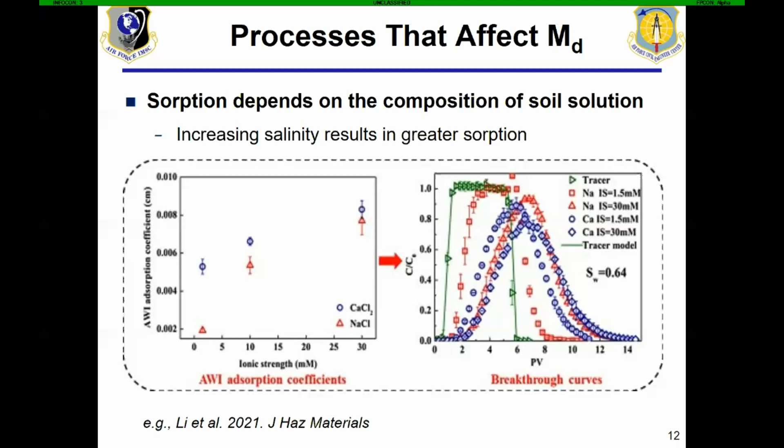Again, emphasizing sorption within unsaturated soils relative to, say, aquifer solids. But one of the more complicating factors to all of this is the kinetics. There's a lot of sorption that occurs essentially instantaneously, that's with the air-water interface. But especially with organic matter, because of the pore size distribution effect, there tends to be this highly rate-limited kinetic component to all of these sorption processes with the solid phase.

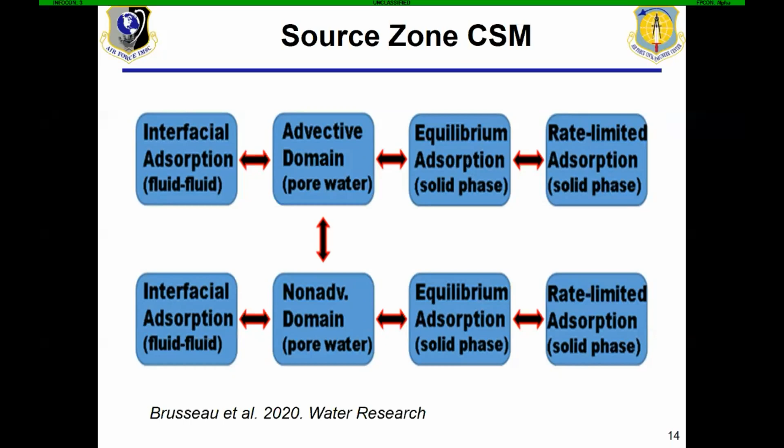There's a solid phase sorption component, an air-water interfacial sorption component, a rate-limiting component, an equilibrium component. And then due to the structure of in situ soils and the pore size distribution effect of organic matter, there's this advective component where water rapidly transports through soils and the organic matter matrix, and this non-advective water domain where solutes move by diffusive fluxes through the interstitial component of the matrix within the structure of soils. So it's this sort of 8-parameter problem that people have deduced would be necessary to parameterize in any kind of predictive capacity. I'll come back to this in a moment.

But all that stands to reason, if the conceptual model is that complicated, then how does one go about utilizing all this information in practice in terms of making decisions about whether a source zone is or is not problematic? The first and most obvious methodology, presented earlier today, is this batch extraction.

Different jurisdictions, different countries have different deviations on this, but nevertheless they all involve the collection of a soil, the processing of that soil, air dry, sieve, aliquot, some sort of saturating extraction fluid, whether it be water, buffered salt solution, what have you, and then aggressive agitation, some sort of separation, and then a measurement of that aqueous phase.

The problems with this is it saturates the sample, so you've eliminated all air-water interfacial retention that would otherwise occur in situ, and you've aggressively agitated the soil such that you've solubilized any water-unstable colloids or aggregates. Not all of those colloids and aggregates would then get separated out. People rarely use filters for these types of analyses. And so you get this additional mass phase in the aqueous matrix that's analyzed along with the aqueous phase. So as a representation of the actual pore water chemistry, I'd say this particular methodology is fraught with issues.

As a relative methodology to compare pre and post remediated soils, however, I think it's perfectly relevant, but it's important to keep in mind the limitations of some of these methodologies. In terms of being a representative surrogate for the actual pore water chemistry, I would say a batch extraction doesn't do a very good job.

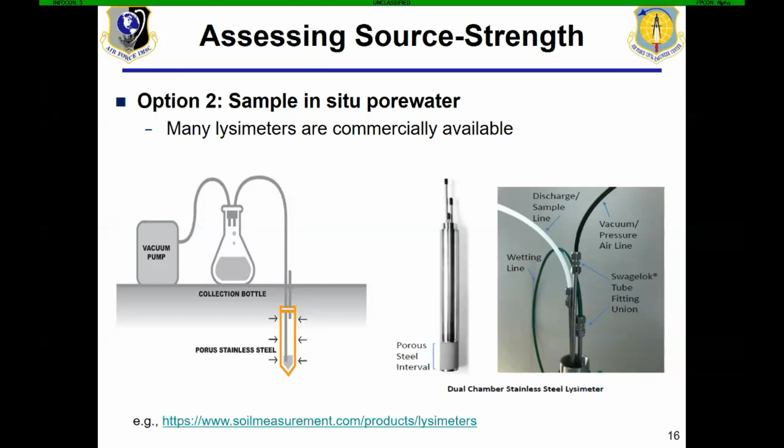They're out there. So if you can obtain a pore water sample with a lysimeter, however it's collected, the options are, like I said earlier, to compare the mass discharge, to spatially integrate those pore water estimates using some sort of geostatistical approach into a mass discharge estimate from soil to groundwater, and then compare that estimate to similarly derived estimates within a groundwater plume with increasing distance from the source. Then you get a relative sense for where all the mobile mass is. And if the mobile mass is moving from plane A to plane B in the groundwater relative to the soil to the groundwater, I would argue you don't have a soil problem on your hands, and you should prioritize your remedial efforts on the actual groundwater plume.

Conversely, if the majority of that mobile mass is still leaching to the water table versus advecting down gradient from the source, then you've got a soil problem on your hands, and you should prioritize remediation of soils.

And for all of you thinking this is so infinitely complicated it could never be done, there's a published case study recently published in the Remediation Journal. This was done jointly by the Arcadis team and the PACE Analytical Lab team with CERT funding, using an application of a mobile lab to generate data essentially in real time. I won't get into the details, but there's a very elegant case study where this type of thing has been demonstrated.

Alternatively, we can get into the strategy of where and how many lysimeters to use, but you can generate a site-specific pore water project action level based on a default attenuation factor, or a dilution attenuation factor from soil to groundwater.

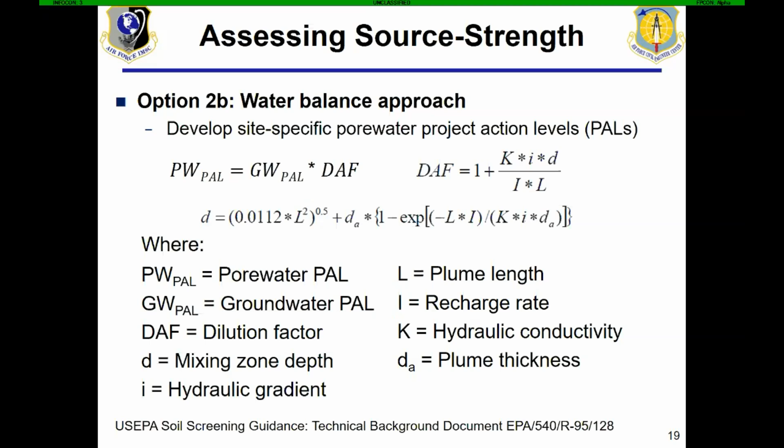But ultimately where all this is going, as the research develops, is we want the capability to take these lysimeter-derived pore water measurements, plug them into a comprehensive vadose zone model, and then make predictions about how things behave, what needs to be remediated, and what will happen to the water table if that remediation occurs.

We've been doing this for a while. I've noticed a bit of a learning curve with our contractor community. It's a bit involved—you do have to do some prep work, but it's nothing that's not straightforward. There are SOPs on all this, but the materials have to be cleaned.

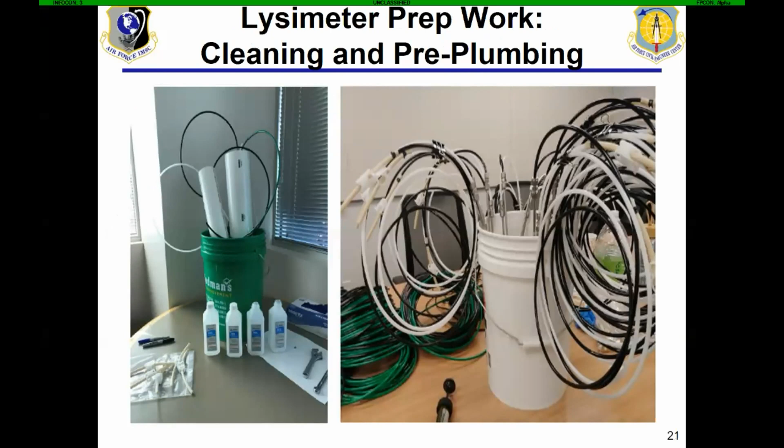We have done all the equipment blanks—they're absolutely PFAS free. They can be installed with conventional borehole equipment; a 4-inch borehole is all you need. You pack the porous portion of the lysimeter with a material called silica flour, then seal the hole with bentonite and backfill with native material.

You sacrifice the first sample to eliminate the dilution artifacts. From there on, assuming there's adequate soil moisture to sample, you get a sample as often as you need. You can finish the lysimeters flush mounted or in a vault, just like a monitoring well.

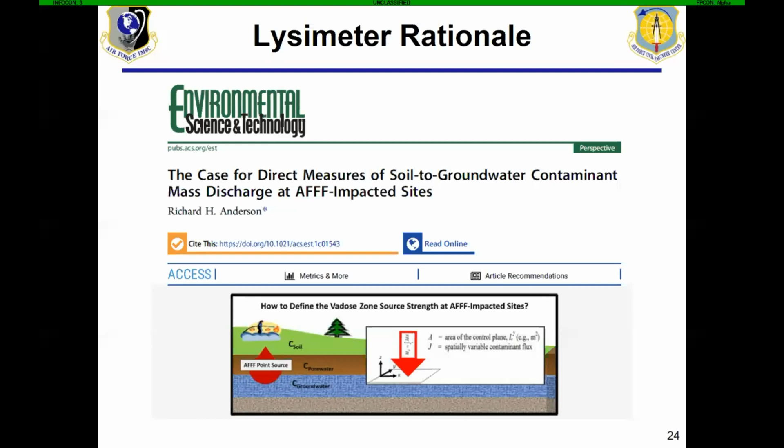And if I haven't convinced you thus far, there's a very thorough description of the logic behind all this, and the information I've just presented, that we recently published in EST. And with that, I'll hand it back over and we can hopefully start a good discussion on all this. So thank you very much for your attention, and I'll stop sharing my screen.

Oh, great. Great presentation, Hunter. And so I encourage people to contribute to the chat. I'm going to go back to one of the first questions we received, and this one is for Anna.

The question is, maybe I missed it, but what is this situation of contamination in groundwater? I saw remedial actions for soil and surface water, but no contamination nor risk for groundwater.

Actually, no action was taken on groundwater. PFAS were detected, but since the aquifer was a perched, seasonal aquifer, water could only be collected from monitoring wells during winter, and there was no usage of water at the site, nor a potential risk of PFAS migration from the site because of the low productivity of the aquifer in the silty matrix. Based on the risk assessment, it was deemed not necessary to take any action for groundwater.

Okay, thank you, Anna. The next question I have is for Helena. Now, you answered in the chat, but in case people missed it, I thought I would ask you so you could discuss it here, which is the question about the efficiency on PFBA and PFBS. And if you could just describe again, as you did, what you might do for that improvement of efficiency.